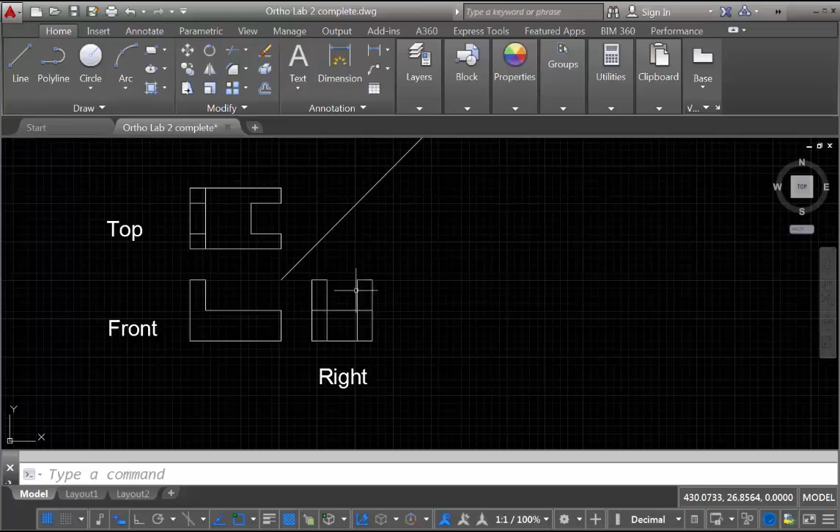Look at our right side perspective, our right side view, and as you can see there might be some things missing here. Notice this projection right there. What's missing is an offset, another line right there, a line that should make that U-shaped section, going back to the drawing there, that U-shaped section. And then there should be some cleanup from this.

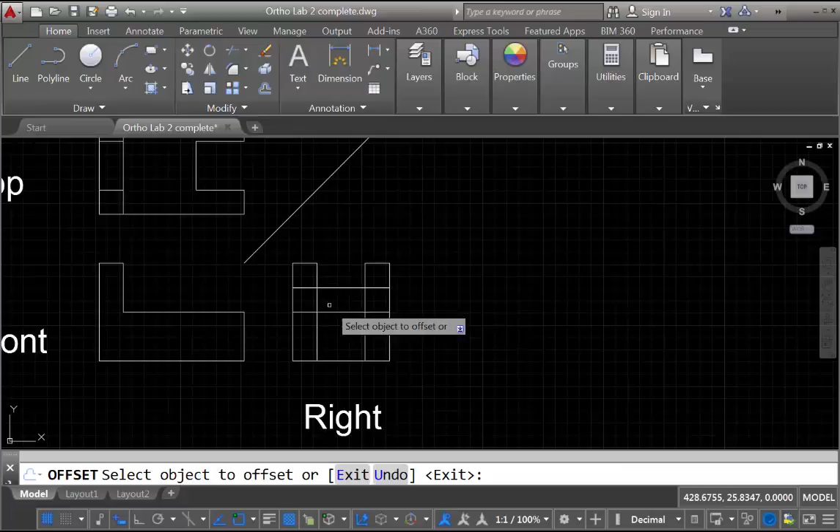So I will go through a demonstration of this and how that needs to go. Basically offset a unit of 1, then click here and go up 1, and then clean up using the trim command, right click of course, and go through and clean that up.

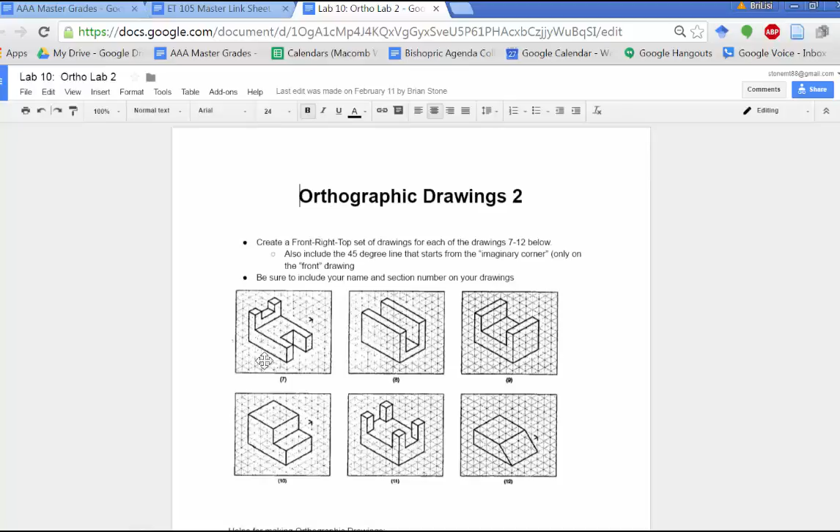So now you see that right side perspective, push escape here a couple times, looks like the view that you see right there as well. That is the drawing there from number 2. I'm going to zoom back out. Hopefully you've had some time to work on this and get a little experience.

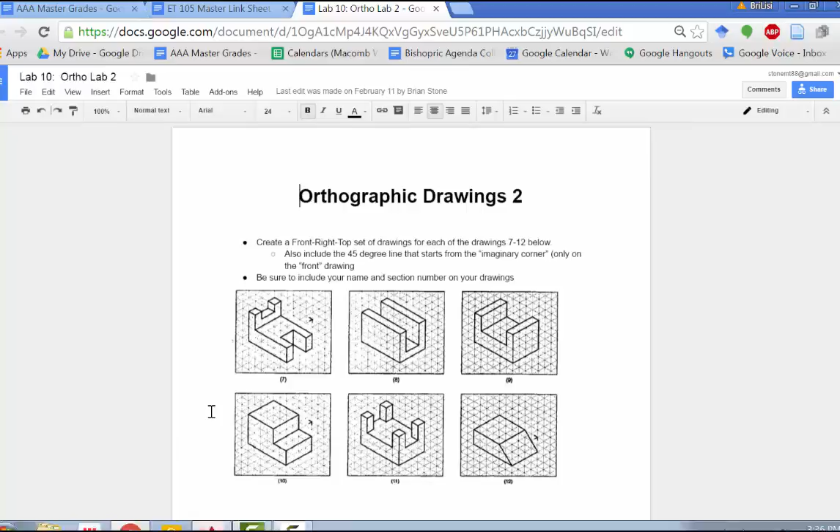Please pay attention to the process here of doing these drawings, making sure that you're following these steps: drawing your X and Y lines, labeling your front, right, and top sections where these depictions or projections will go, using your offset button to draw these lines, leaving the same space between your front and top and your front and right. Last but very important, use your trim command to erase out anything needed there that needs to be taken out.

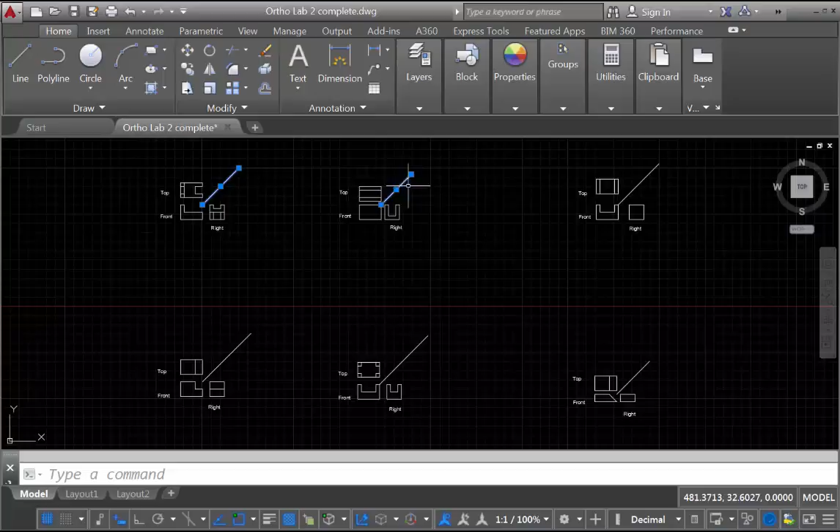Also, if you notice, these drawings have the imaginary corner lines drawn out. Sometimes these lines start from midair, the area where they start from, lining up with this line and that line, and other times they go to the corner of the drawing. So that's just a quick review on there.

Now what I'm going to do is go through another demonstration of circles, which is our new set of commands for today. Circles here are on the top left of your screen in the home tab and ribbon.

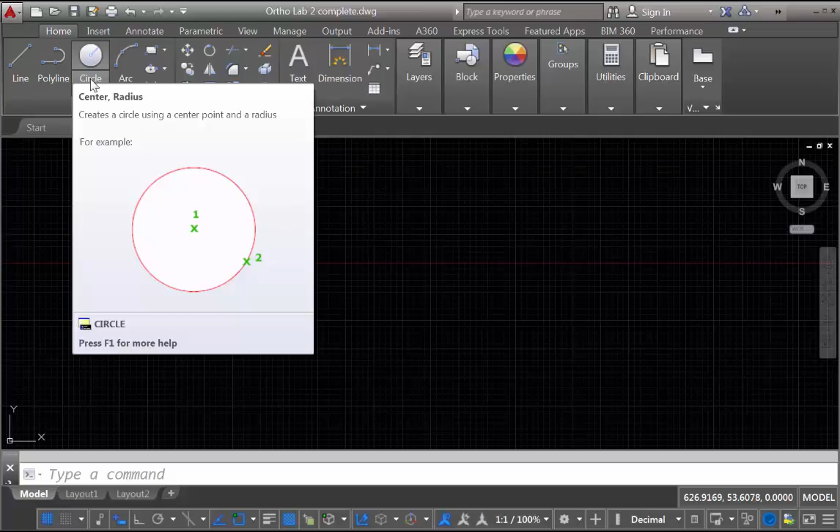Now if you see this circle area, it gives you a demonstration of what it does, how it works. Most of the time you're dealing with either a radius, a diameter, or a certain point where you want to draw a circle. So I'll give you the basics on that. If you want a circle, click in that pull down menu. You have different types: center radius, center diameter, and so on and so forth.

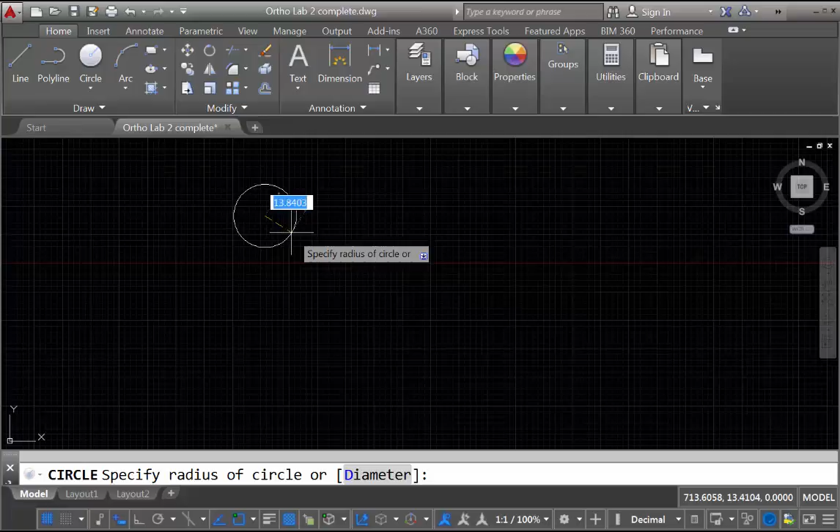Quick demonstration: if you click on center radius and pick a point, I'm going to pick a point here and left click it, then type in the radius that I want. I'm going to put a radius of 2. That means a diameter of 4. That's one. I'm going to draw another circle.

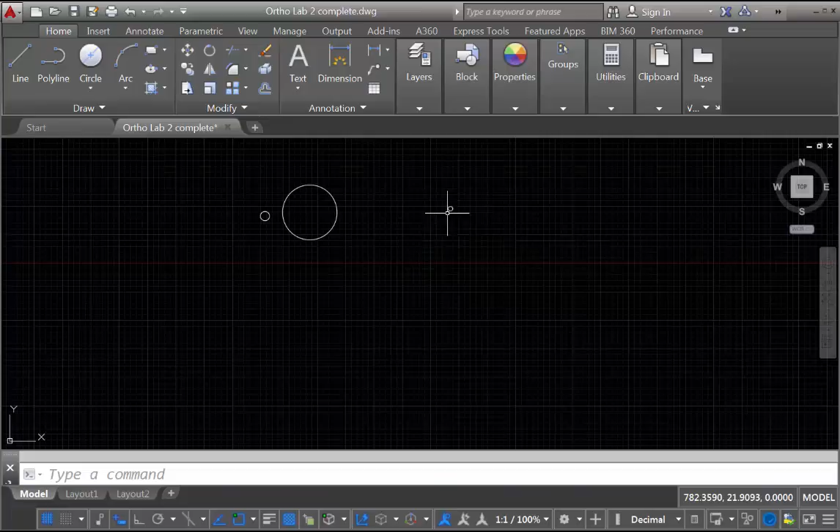This time I'm going to do a radius, but instead of typing in a number, I'm just going to set it as that. That's another radius there. Now the third circle I'm going to draw is from this second button here, center diameter. Click on that and you do the center, and if I do a diameter of 2, notice how this one is a lot smaller than that one because it's got a lot smaller radius.

So other things you could do with circles: if you want to draw a center radius circle, you could draw it through the center of this circle here, click on that, and it draws it. It helps you find the center.

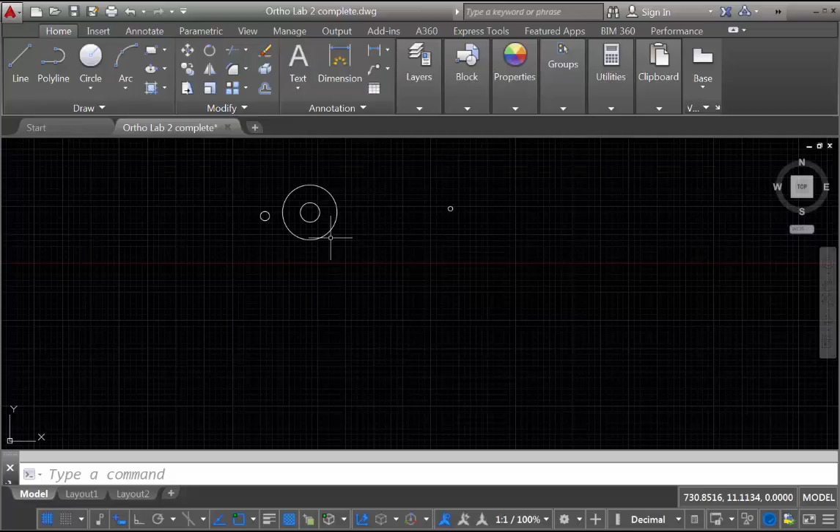Another thing about circles you can draw is a 2-point circle. You just click 2 points that you want the circle to touch. So if I want, I can draw a circle here, touching here, and let's say I want it to touch the middle of that other circle. So it's now touching that one point, it overlaps here, and goes through the second circle I was drawing.

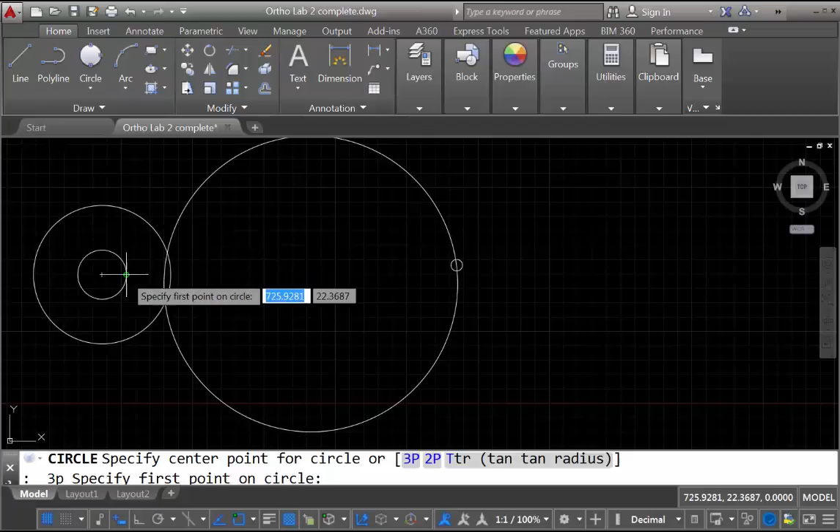That's a 2-point circle. A 3-point circle is the same concept. I can make it touch here, try to get it to touch here, and go a 3rd point, touching here. So it touches those 3 specific points that I chose.

Then you can get into a little more complex circles. Let's say if I draw some lines...

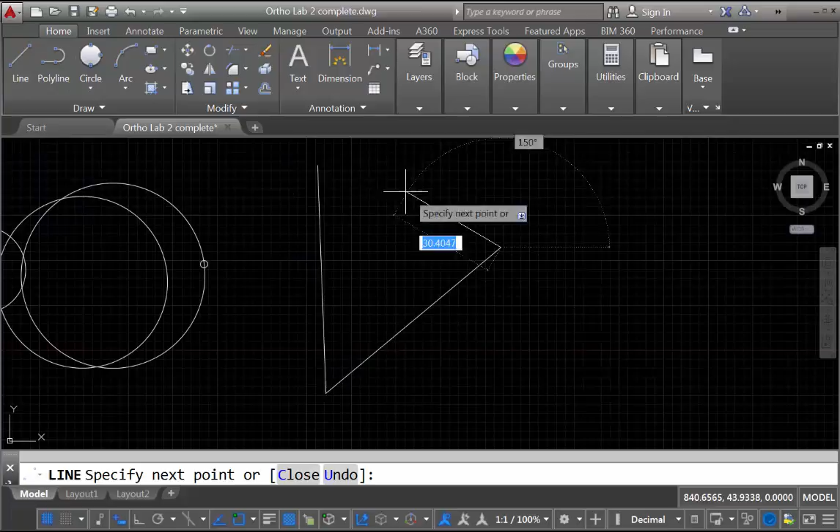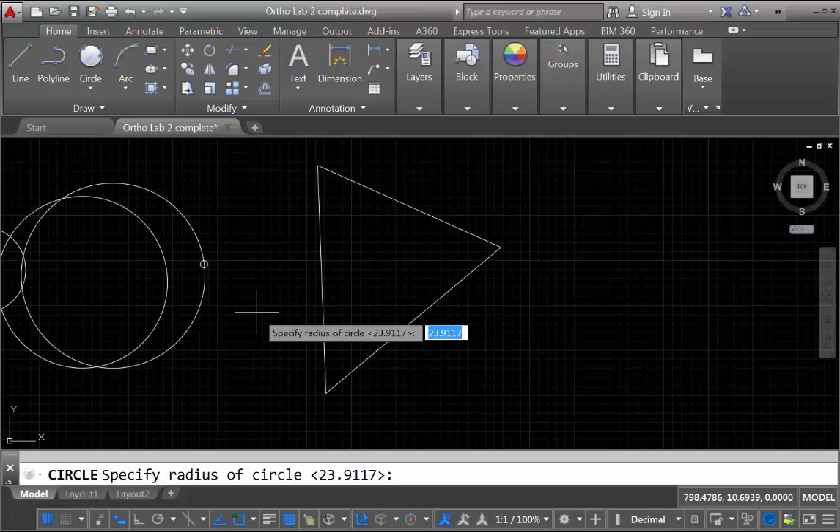If you click on the tan radius, that allows you to draw a circle that will be tangent to a point that you pick. Let's say I pick this point here, and I want it to be tangent to this point here, and then it suggests a radius of 23.9117, so I'll do that. You see what it does?

It's tangent to the points that I picked. I must not have picked that, touched that very well.

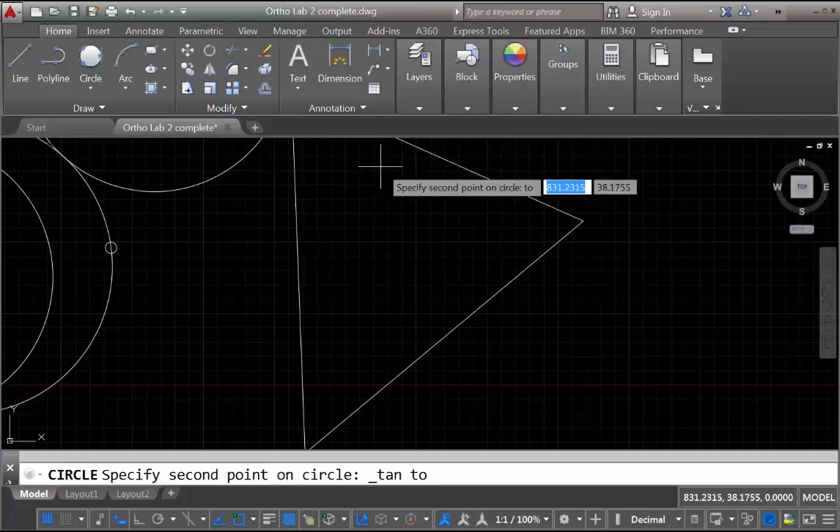So try another one. I'll do tangent, tangent, tangent. If I want my circle to be tangent to this point, and possibly this point, it gives me a circle that is inside of this triangle. So it takes a little bit of playing with that command.

Now with this next lab, I will go through the basketball court assignment, the basketball court lab. In this lab, again, we will use the offset, trim, erase, and circle commands that we've learned so far. So this is the assignment.

You can download it from the website, it's called the Basketball Court Lab. Let me enlarge it just a bit so you can see closer what we're looking at. The purpose of this lab is to draw a basketball court, as you can see down here at the bottom. It can either be this way, with the rim close to the base or bottom, or you can draw it with the rim off to the right. In today's example, I'll give it to you as if you were drawing the rim down below here.

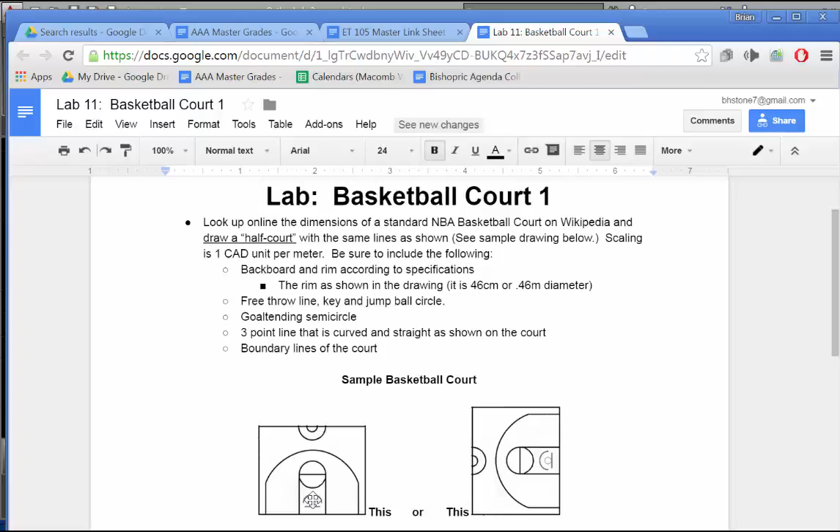So this is a standard basketball court, the basic lines. If you wanted, you could look this up - I'll give you a reference here at basketball court dimensions. Going back to the assignment, what we have is a simple version of a basketball court. This is what I'd like you to draw, something like this, just single lines.

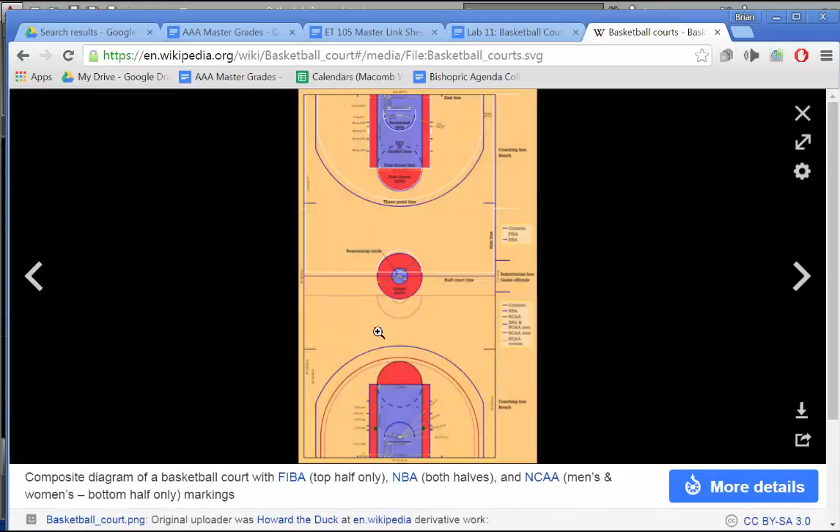But going into basketball court dimensions, I'd refer you to the Wikipedia page under basketball court. Wikipedia has a great description of it. If you scroll down from the top, you'll get a couple of different courts. This one in particular is a nice one. I'm going to pull it up, and what it is, is the dimensions.

I'm zooming in, clicking on this, the key to zoom in. It gives you the dimensions of the court, but it does it by different type of sport. For instance, the NBA is everything in blue, and anything black would be NBA as well as the others. So you have blue here - this is the 3-point line from the NBA, but because the sidelines are the same for all, whether NBA, NCAA, or NCAA women's, it's all black here.

And then if you go down to the key, what's known as the key, the free throw area, the blue or black is the NBA section. So what I'm looking for is something that will look like this, but follow the dimensions given for the NBA size court. So let's look at the width and the length first.

Again, the assignment says to look up the court, that's what I've just shown you. Draw a half court with the same lines as shown, put it as 1 CAD unit per meter, so we're doing everything in meters on this assignment. Notice here the width listed in yellow is 50 feet, but also 15.24 meters.

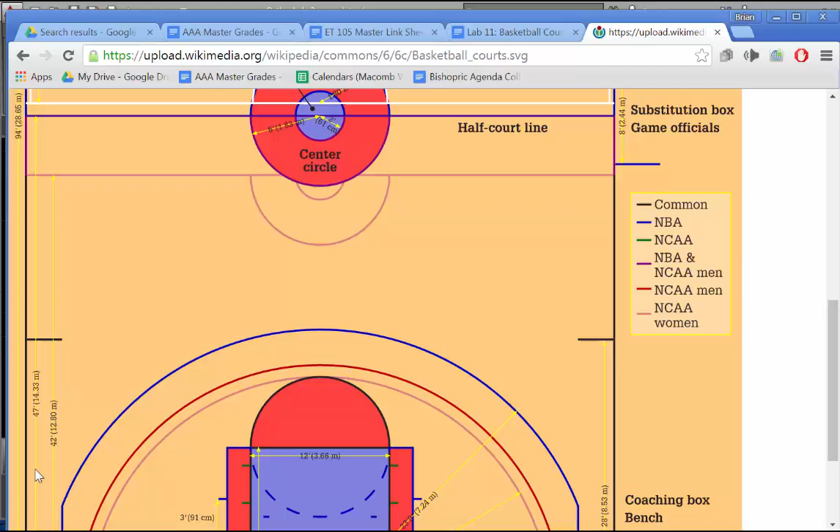Now in this assignment, we want you to draw everything in terms of meters. So that's the system you're using. Let's start out here. Again, I've got 15.24 and 14.33. Start out with an AutoCAD drawing.

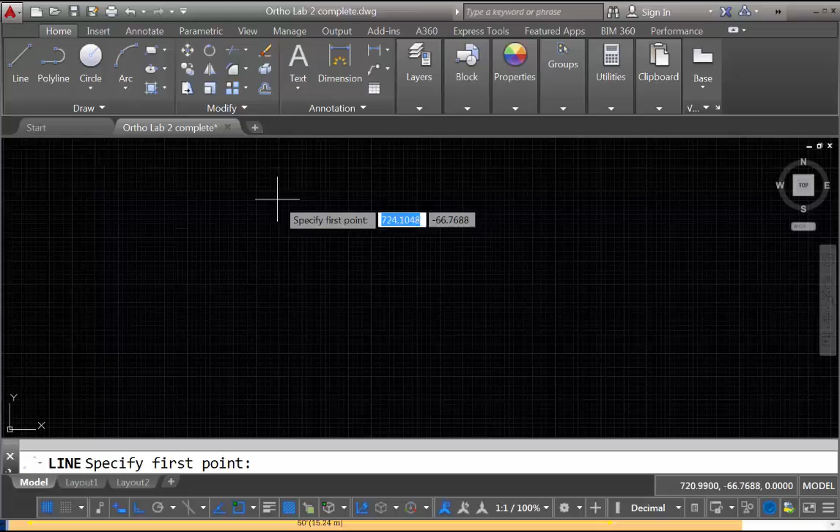I'll scoot this way. Let's start with the whole thing is only going to be about, let's say 40 or 50 meters. So let's just make it about 60 here, and again about 60 here. Now if this is my X and Y lines that I'm setting up, I'll start by doing that.

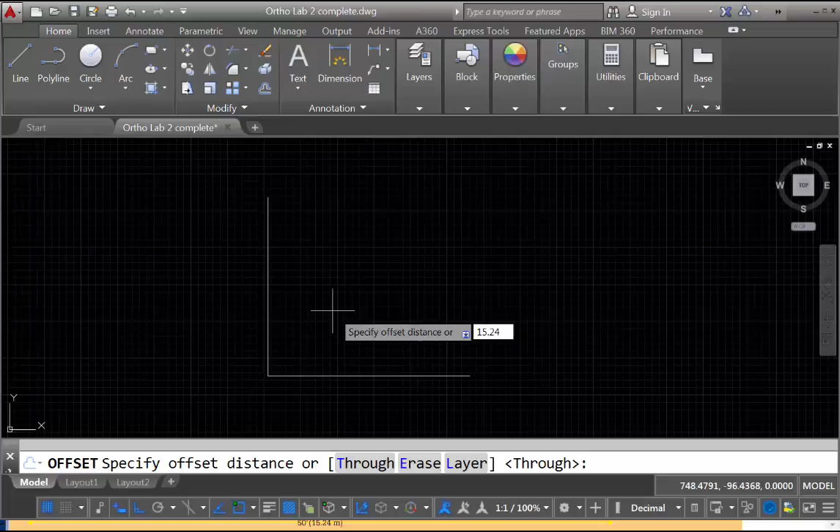Remember I said the width of the court was 15.24, and that's listed from that map there. So if I go this way, 15.24, and then for the length, at least to half court, keeping it on the offset command, it is 14.33. And so what I've done, I'm pushing escape now.

I've started out with the width and the length of the court as shown in this drawing here, width of 15.24 and 14.33 for the length. Now also notice, I'm going to show the other diagram here on the assignment. This basketball court, if you were to take a line and draw it right down the center, you would notice that one side, let's say the right side, is a mirror image of the left side. So everything is a mirror image of the other, divided by the center.

So some hints I would give you in drawing this assignment: take this half court, take 15.24 - I'm pulling out my calculator, and here's a website calculator - take that number, 15.24, and divide it by 2. So I can basically draw a halfway mark for the mid of the court. 7.62 is my number.

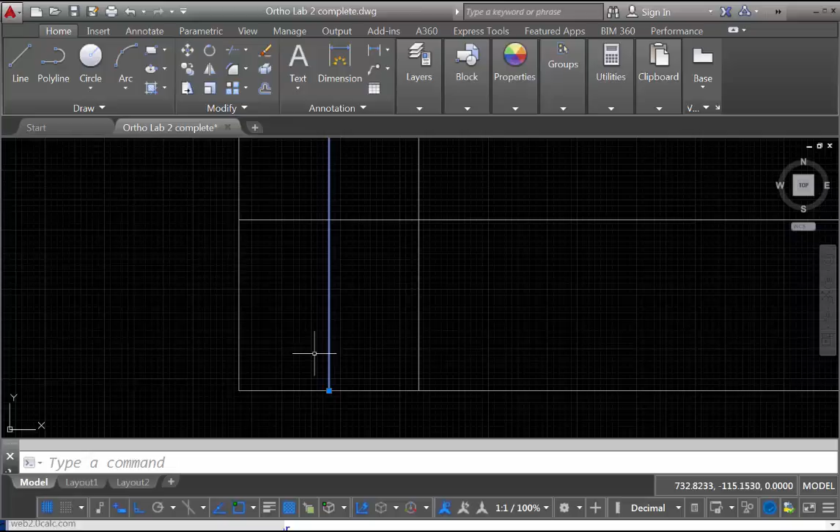So we'll go back to the AutoCAD section and offset 7.62 as a number, and then offset. You can either do left to right or right to left, either way. So this line here, and I'm escaping out of the offset command, that line here represents the exact center of the court. If I were to look at the assignment, that would be the line you could use to split down these sections here.

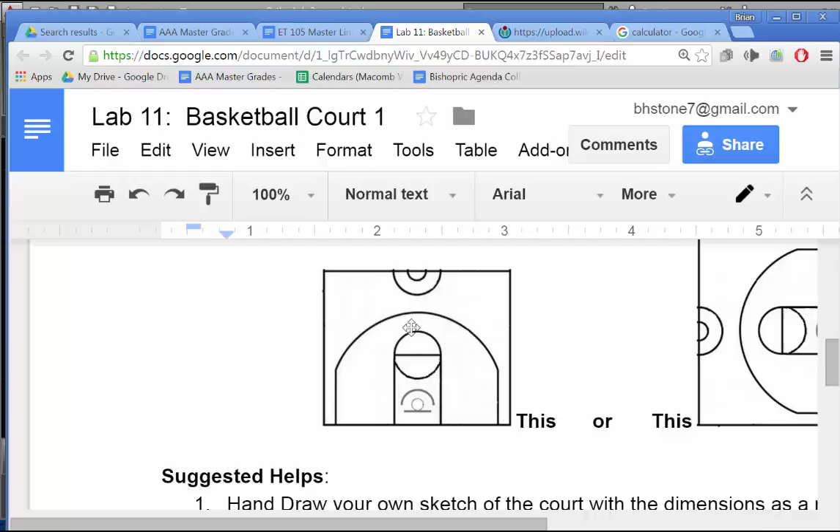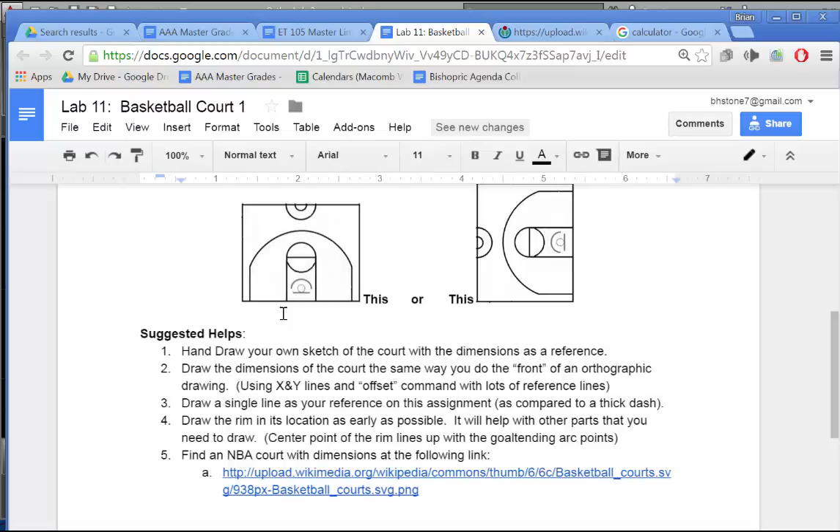Really what I'm meaning is the line represents the midpoint of these circles as it goes along. Now, one of the hints I give you in this assignment is to start out drawing the rim. So let me quickly run through the rest of the instructions.

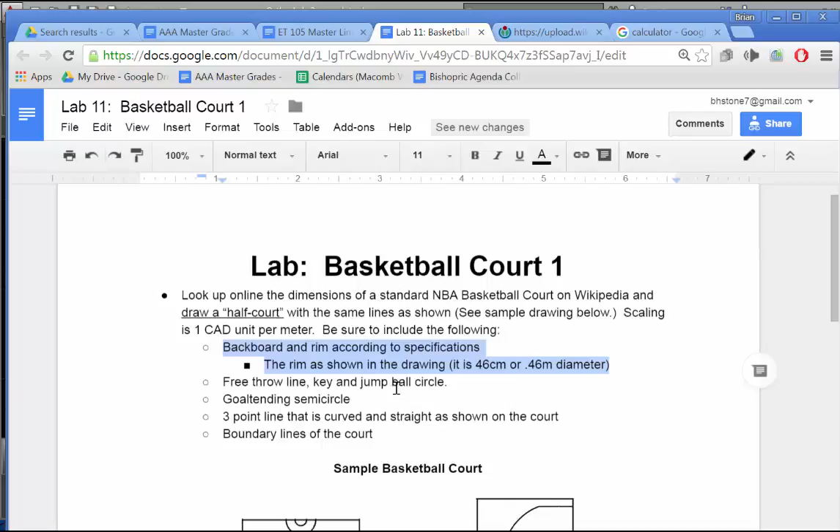It says to do the backboard and rim according to specifications. The rim itself is 46 centimeters, or in meters, 0.46 meters in diameter. The free throw line, the key, and the jump ball circle are all in this area here. The goaltending semicircle goes right around the rim area. The 3-point line is curved and then goes straight, and then of course the boundary lines of the court. So these are the instructions of what you need to draw.

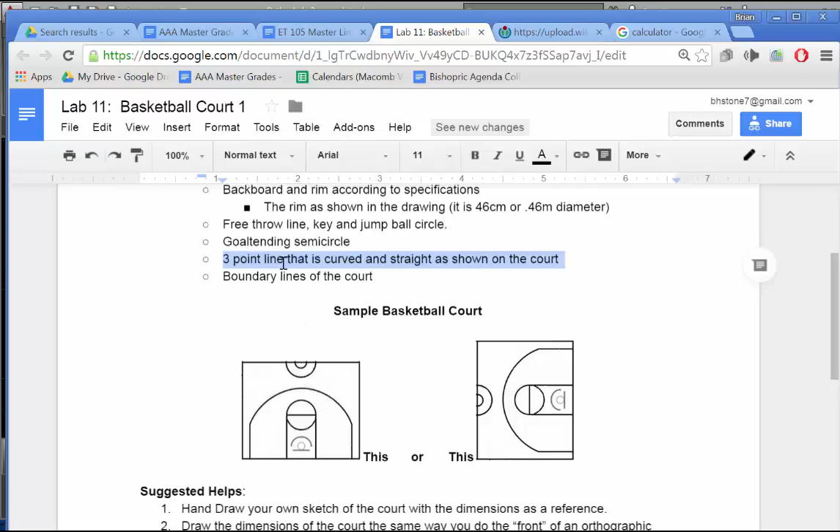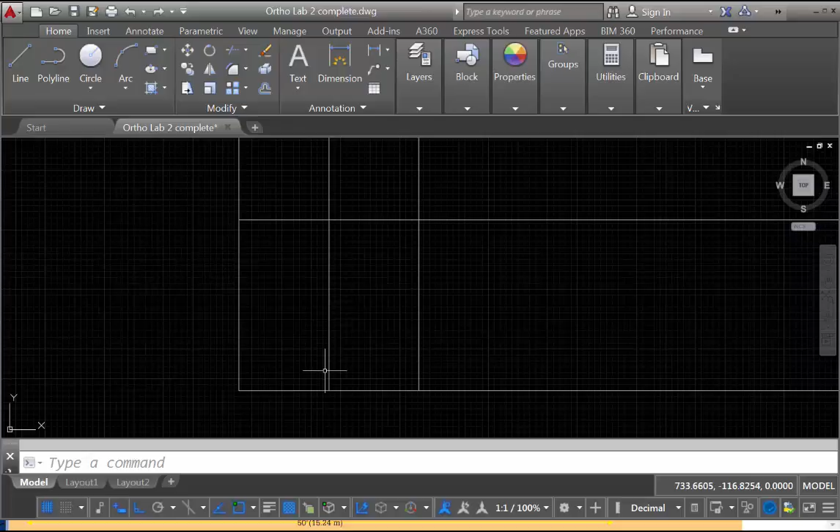If you go to that Wikipedia page, you can download this or view it as you go. Sometimes it helps for students to draw a sketch of the dimensions and go from there. But for right now, we have this half court section. We've split it in half, and now it's time to start with the rim, which is what I recommend first.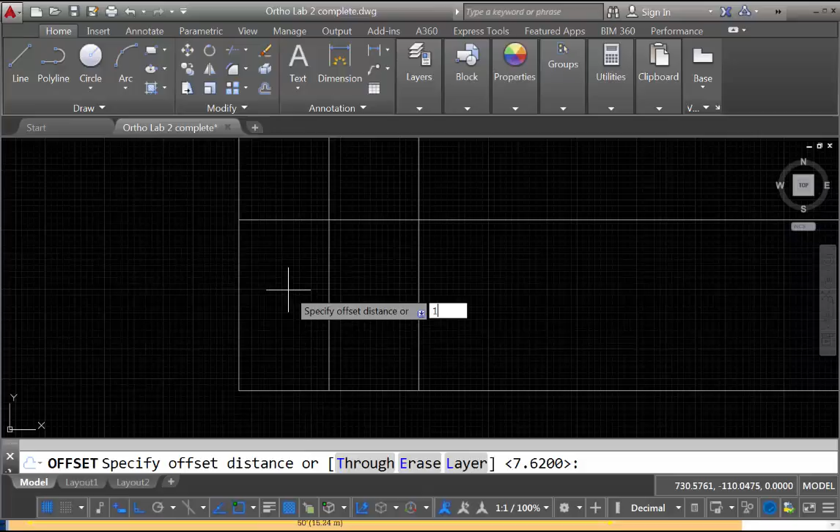So let's go back here, offset 1.6 meters up there. So that rim will be right there. And if you remember, the assignment says the rim is 0.46 meters. So let's go to the circle command, do a center diameter - that's what it calls for, center diameter - and then start with the center point. We'll go right there, and 0.46.

So it gives me a circle that has a diameter of 0.46 meters for the rim. That's where the rim sits. These reference lines here are just there to help us locate where certain items on the court are. At the end, we clean that up and erase them all.

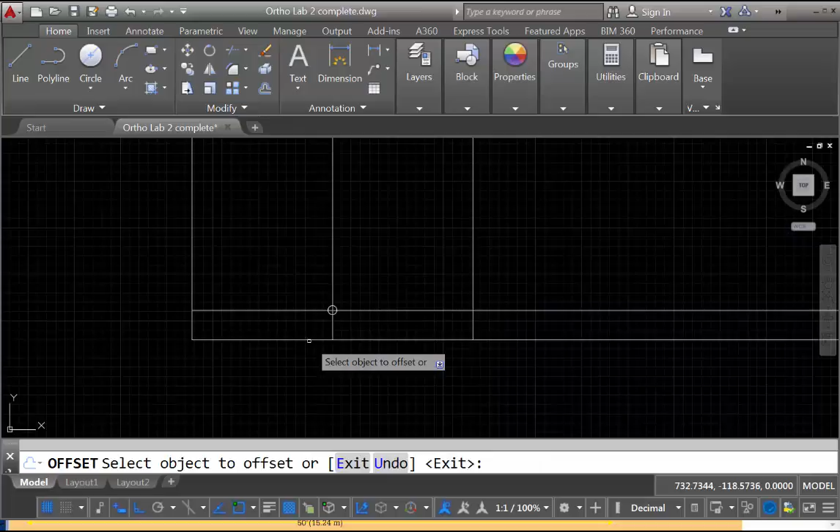Let's go back to the map drawing. Notice that the rim is there, but the backboard, this black line, is listed as 1.22 meters. Let's go back to AutoCAD and offset 1.22 meters, go up there. So that rim lies right about there.

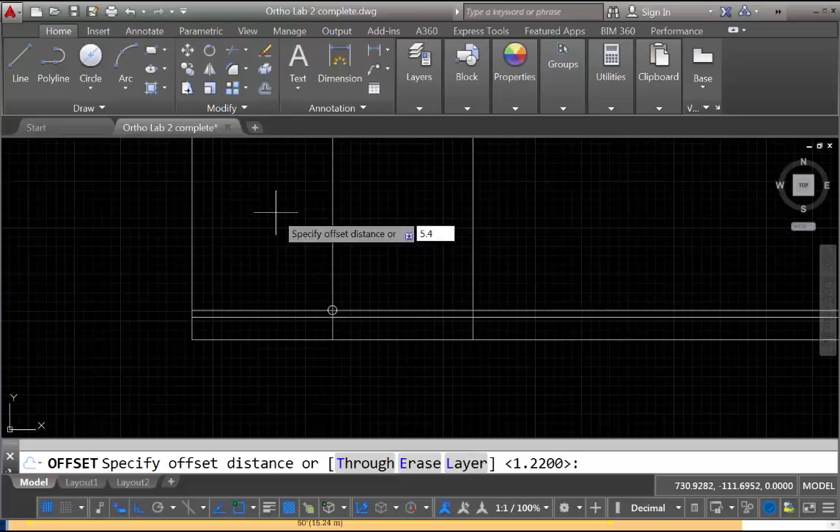Okay, back to the map. Go back to the drawing. You notice that the free throw line is 5.79 meters. So I'm going to do a reference line that gets me at 5.79 meters, and then I offset up. So that's the free throw line.

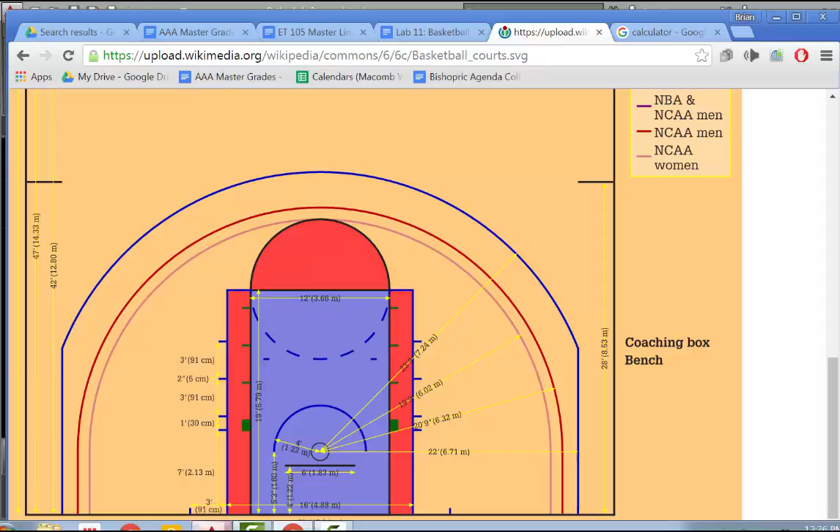Also, you notice that on the drawing, the circle for what they call the top of the key has a diameter of 3.66 meters. So I have this crisscrossing section right there which tells me where that circle should be. Let's go diameter, do the center, and 3.66 meters as a diameter, and that gives me the free throw line key.

Now, as you go through this drawing, other things you'll want to keep in mind—let's go look at it again. You can start carving out or drawing out sections.

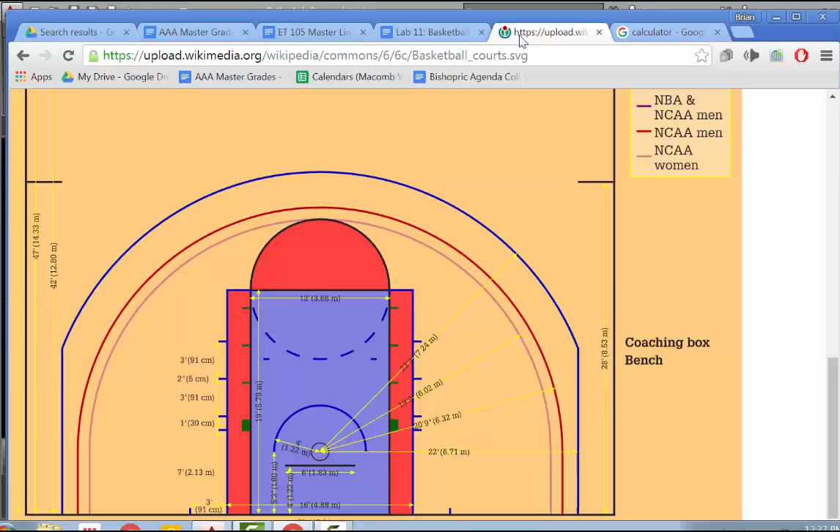For instance, this circle here, the top of the key, you can just draw a line that connects straight down. Remember, as the assignment shows—where's the assignment here—it shows you only need that simple line going down. You don't need all of the extra dashes and dots listed on the map here, these other dashes there. So from here, you can just take that drawing and draw a line.

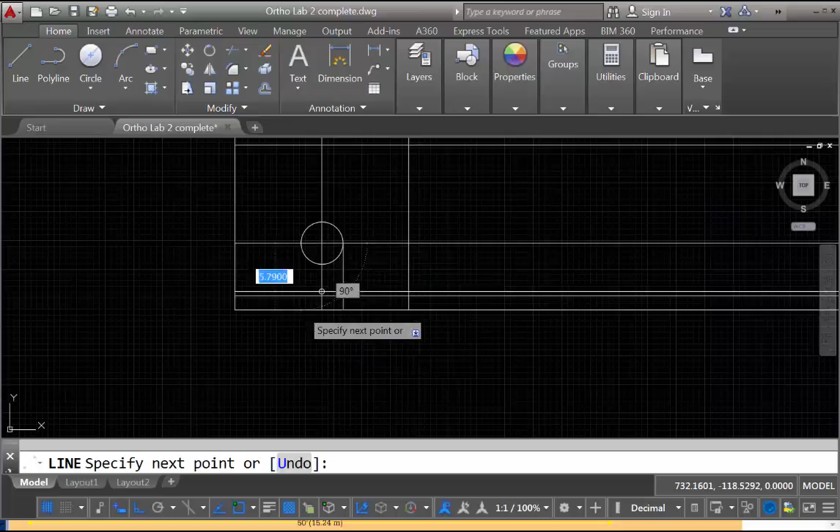Make sure your ortho is on—that one's on already. Connect there and bring it down, connect it to the base there. Escape, type letter L for line, and draw the free throw area. So it's all kind of coming together.

Let's go to a couple more circles, 2 or 3 more, and then I'll set you free on this. Notice that the free throw, or the 3-point line—you can shoot behind there and make 3 points—that is 7.24 meters, but it's based off a center point that's right in the middle of the rim. So 7.24 meters. Back to here.

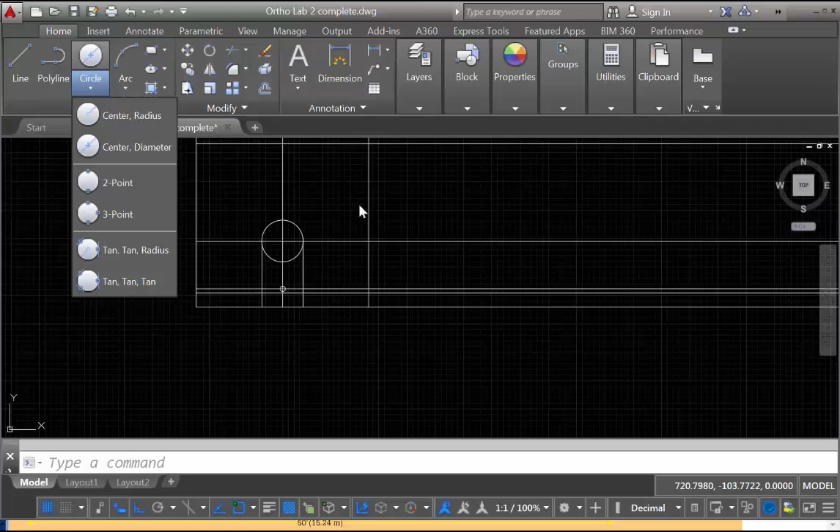You can say I want to draw—remember that was a radius because it's just half the distance from the center to the outward part—7.24 meters. Let's go right in the middle there, start that there, and 7.24 meters. That is your 3-point line.

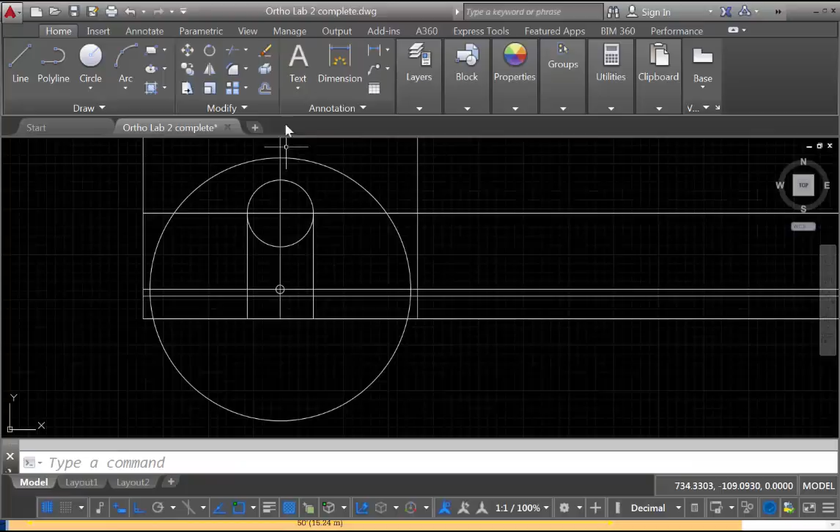So you have the straight section, then it starts to curve the same way—that goes straight here, straight there, the blue, and then it starts to curve.

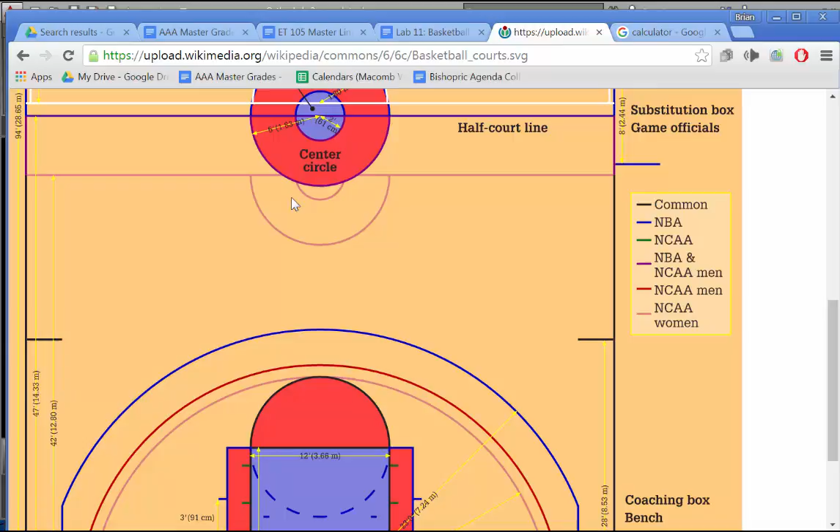Okay, two more circles I want to show, and then I'll let you go free. Of course, you have to clean up all the non-used lines, just clean out the reference lines. But notice this inner circle and then the outer circle—this is the jump ball area, also known as the center circle. That one is 61 centimeters as a radius, or excuse me, a radius of 1.83 for the other.

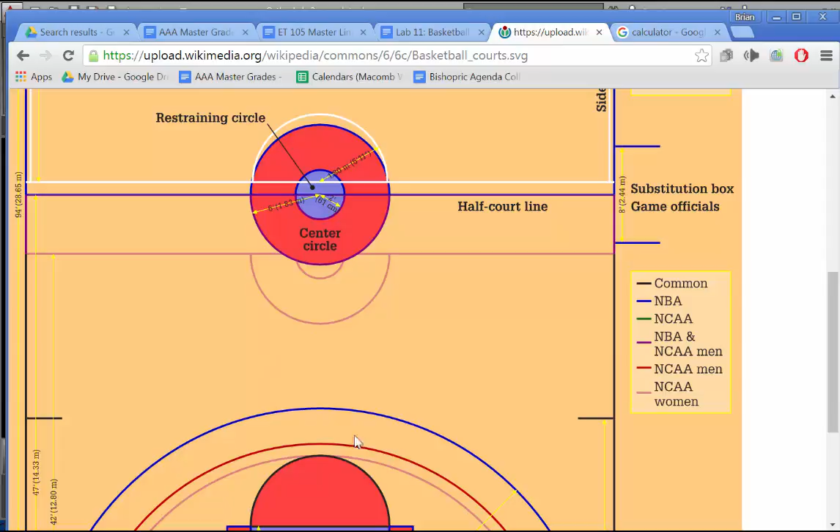So 61 centimeters is 0.61 meters. So it would be 0.61. I'm writing this down so I have a good reference. Then the other one would be 1.83. So 0.61, 1.83. Let's go back to the drawing.

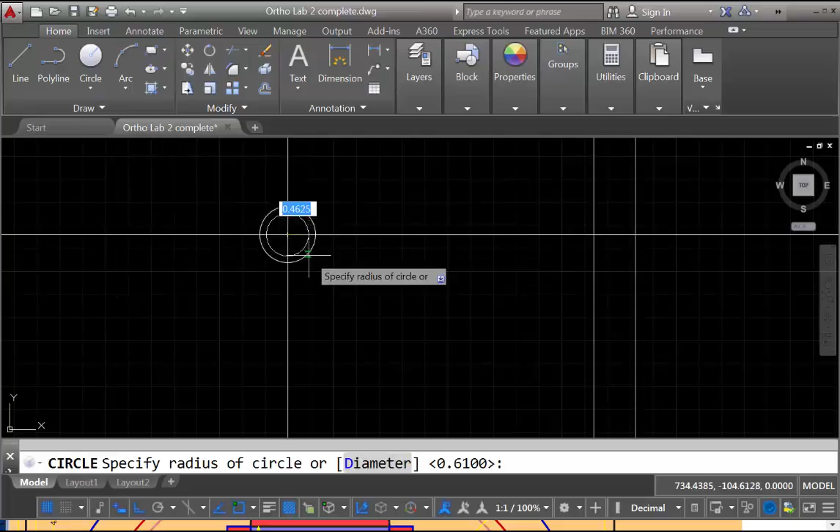We have our reference lines cut up, and we'll start up. Remember, these are radius dimensions. So we'll go to the middle and type in 0.61 and do another circle, center and radius, and we'll call this one 1.83, and that draws our half court circle.

Now keep in mind, the assignment only asks that you draw half a court. So if you take things up to this step, then you can start to clean up and go off your measurements there. And that is our assignment for the first basketball court. Good luck.